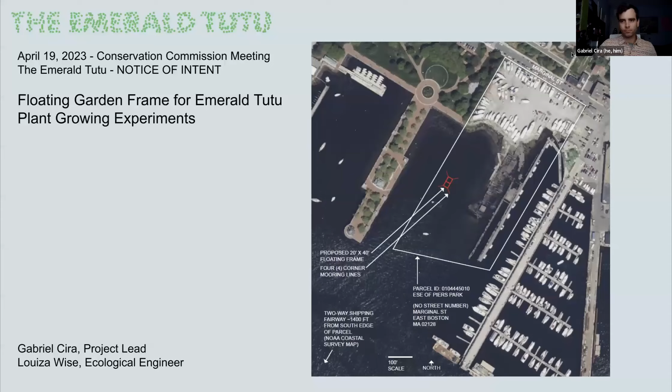Next item on the agenda is a notice of intent, looks like unassigned DEP file number and unassigned Boston file number from Nitsch Engineering on behalf of the Fallon Company for the proposed residential condominium development and subsequent landscaping and stormwater improvements located at 1 Harbor Shore Drive, South Boston. Resource areas are land subject to coastal storm flowage, waterfront area, and 100-foot buffer to coastal bank.

This has been continued from the May 3rd, 2023 hearing. Who's here on behalf of the applicant? Good evening, John Schmid with Nitsch Engineering, and with me is Richard Martini from the Fallon Company. I believe we have a DEP file number 0061938.

Elena, what does that give us for a Boston file number? Yes, sorry for that. It is going to be... That's all right, presumably we have one now. Okay, we do. Okay, good.

So John, I think where we left it off, we had questions about the sales office and its location. Sure, and I think you've made some changes to that. Is there anything else? No, if you'd like, we can scroll forward to the information we submitted regarding the sales office. Yeah, let's focus on that. Thank you.

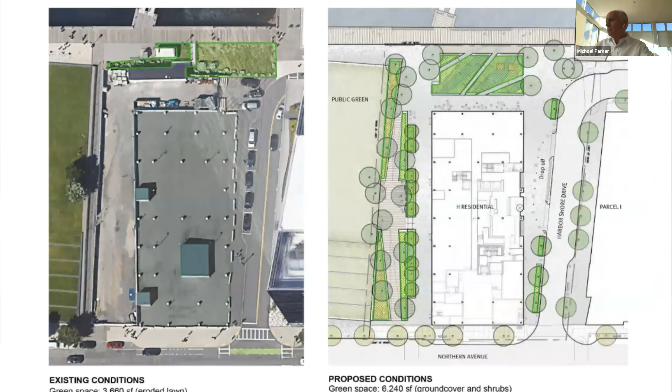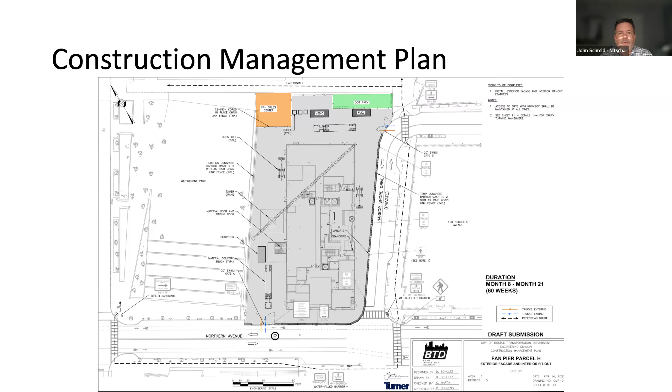One more slide. Okay, so this, as you recall from the hearing we had a couple weeks ago, this is the construction management plan. The orange block in the left corner of the construction area is a temporary sales office. It will be constructed for the duration of the project and removed prior to project completion. Concerns were raised that it was in a VE zone. If you go to the next slide.

So we've advanced the design on the temporary sales trailer within the VE zone. What you can see here is a section where the trailer as proposed would be on piles, and the bottom elevation of that trailer would be at the VE floodplain elevation of 19.48 or 19.5. This would allow for the free flow of water, except for the 3 rows of columns, the free flow of water should there be a storm event that causes flooding in this area.

We believe this is in compliance with the requirements for construction within VE zones. But we also ask that the commission consider and understand that this is a temporary structure. It will only be here for several years during the construction of the building. My client would prefer if we could construct this on temporary prefabricated concrete pads, and then should there be a storm event, it would be enclosed with the aqua fence, the same aqua fence that we're using throughout the development, should there be a flood event. That is sort of the extent of our presentation regarding the sales trailer.

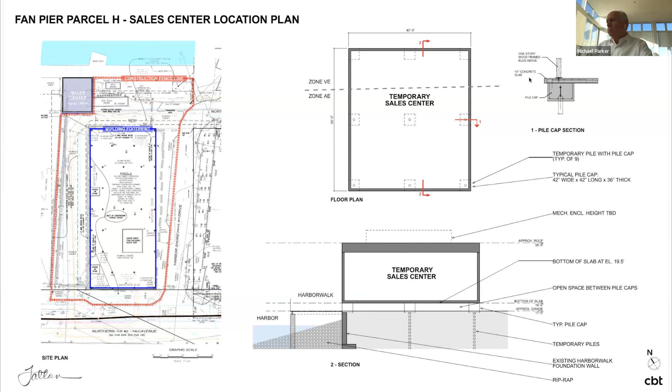I'm going to go to Commissioner Herbst first on this one. This is her area of expertise. What are your thoughts?

Well, my main perspective is it needs to be code compliant, and V-zone does require being on pilings. So if you were to use an aqua fence, the point of the V-zone requirements is that water can flow through freely. So I think you'd actually be increasing the likelihood that it would be knocked off or relocated. Unless there's something that I don't know about temporary buildings, I assume it needs to comply with the V-zone requirements, and I think it should, for a couple of years there's the possibility that there would be a storm like that.

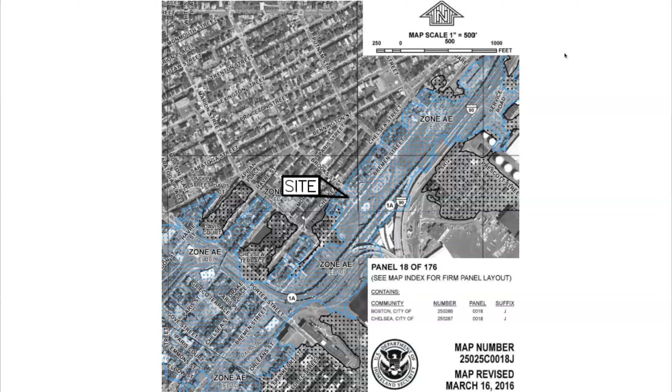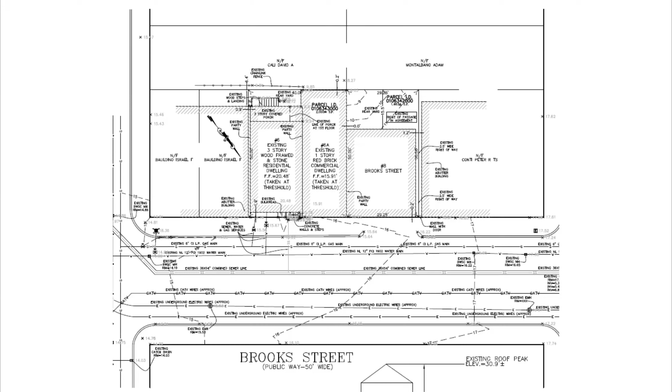But as far as land subject to coastal storm flowage, the project - again, the buildings are going to stay exactly as they are. The structure of the building will stay exactly the same, where the 3-unit building is, you currently step up to get in. So all the living space will be significantly above the floodplain elevation of 16.45. So the grade out in Brooks Street is anywhere from 15.5 to 16.5, but there's 3 or 4 steps to get in. So we'll maintain the first floor living space, and then all the new additions will be significantly above - I think they start somewhere around elevation 20, if not higher, on either one of those buildings. And then if you could just move to the next slide.

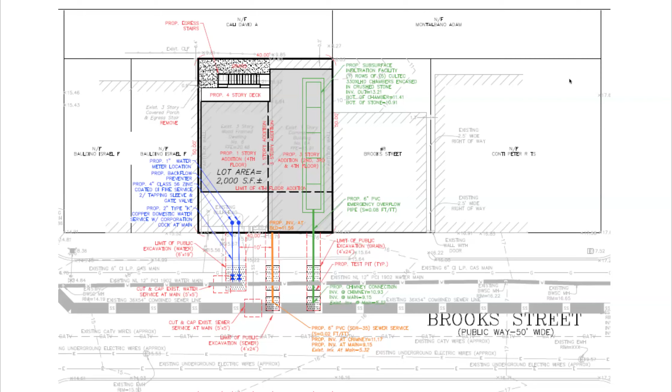I'm happy to answer any questions, Eric. Yep, okay, so you're ready. I was going to say I can answer any questions you guys have. I think it might be the easiest way to do this.

What's going to be in the basement? In other words, where will the mechanicals be? The mechanicals will be above on the first floor or higher, making sure they're above the floodplain elevation. That first floor of the residential is significantly above the floodplain elevation, and they'll all be on that first floor or higher.

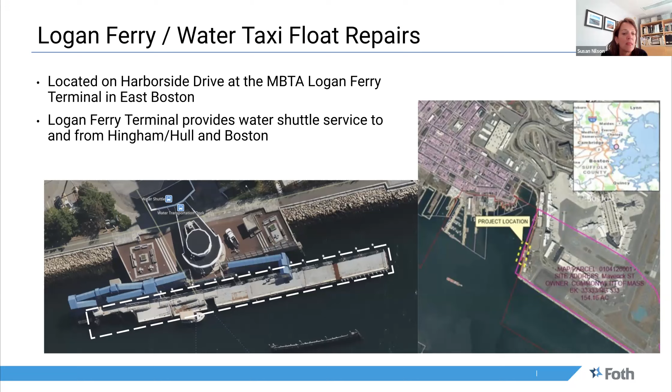So the purpose of the project is for public safety as well as to maintain public infrastructure. These floats are showing signs of wear and tear, primarily in corrosion, but also in some of the steel components.

Looking at, we have a number of photos I can share. Looking at the steel decking, you can see that that's corroded and scaling. And then photo 3 shows the access hatch. Some of these are unable to be opened and require replacement. Also depicting the transition plate here.

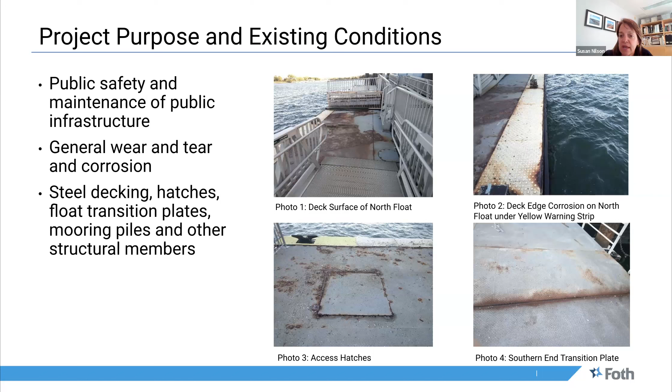If we could go to the next slide, just have a few more photos to show the gangway plate is missing the caution strip. I mean, some of these are minor, but still just wanting to highlight. Also, the gangway pins require replacement. That's causing some of them to be off alignment, which, as you can see in photo 9, creates a potential tripping hazard, just being a little bit off grade there.

So looking to be able to address all of these items through maintenance, again, of existing infrastructure. We could go to the next slide.

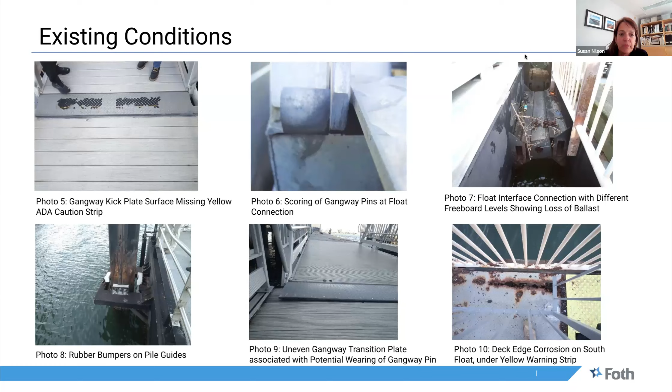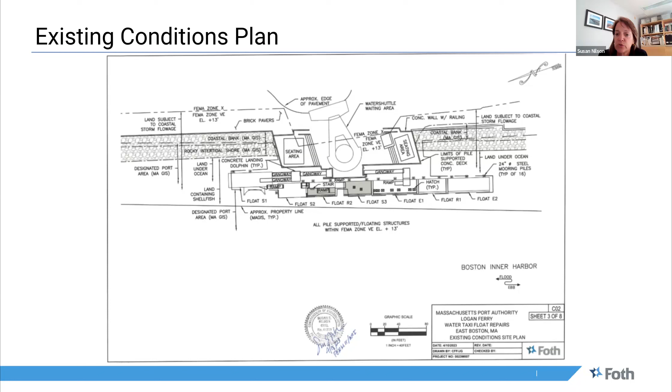I talked a little bit about it as we went through the photos, but the proposed repair plans include restoration of the float edge. So some of that edge stripping, the connections between the floats, there are pin connections there that require replacement, and then replacement of 2 hatches and gangway pins, and then also restoration of the deck. So that's the work that would require removal of the corroded surface down to a surface that would be ready to receive a new coating system, and that would preserve that steel and minimize the future corrosion on it.

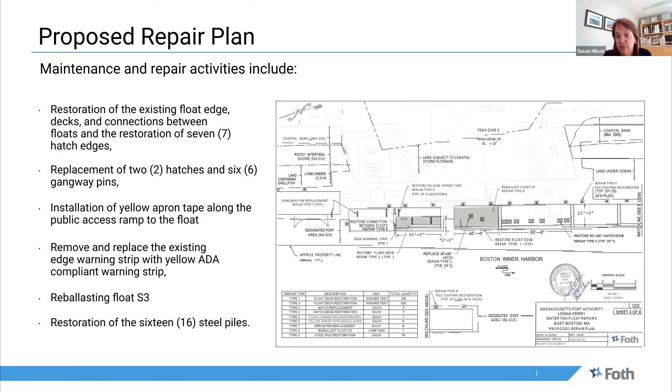And then looking at reballasting the float, which we need to get in with the access hatch and be able to reset that. And then potentially we'd look at also repairing the coating on 16 of the steel pipe piles. The steel pipe piles are what's anchoring the float in place. So the next slide.

So as we stated at the beginning, the coastal resource areas the floats are located within land under ocean, a designated port area, land containing shellfish, and within land subject to coastal storm flowage. And then they're also within the buffer zone to the coastal bank and rocky intertidal shore, all of which you can see on the photos here.

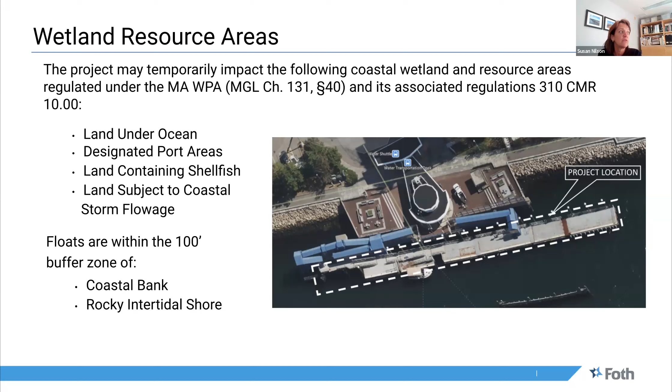That will be a temporary impact. We estimated 19 square feet, assuming, I think it was pretty large size. I looked at 24-inch diameter, which the spuds are probably smaller than that, but just looking for the maximum impact for 4 spuds. That's a very temporary impact. It's just when the spud is placed in the bottom that you would have it drop. It's done by gravity and placed. And then once that's removed and the barge leaves the site, that impact would no longer have... I'm sorry, I couldn't tell if someone was asking a question.

And then on the temporary impacts, we also could have a small staging area on the land side that is an existing developed site.

We may want some space for the contractor if he needs to access from land in addition to the barge. Keeping in mind that their materials for this work are primarily steel replacement or aluminum for the gangway, there really isn't any sort of stockpile or loose material as part of these repairs.

We did include in the notice of intent, and intend to include in the solicitation for bids, a requirement for the contractor to provide a containment system for the surface repairs.

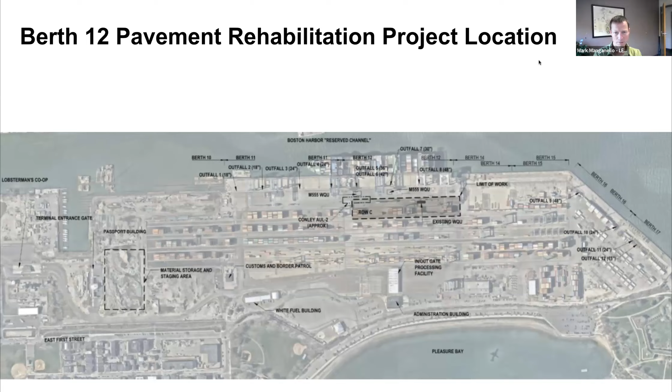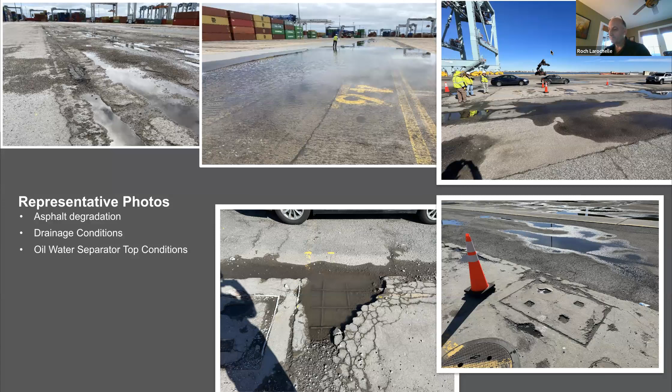These are some representative photos of the area that show the poor conditions of the surfaces there—deteriorating pavement, poor drainage. The project's designed to resolve some of these issues within the project area. And I should say this is part of an ongoing improvements program at Conley Terminal. There are multiple projects, a couple of which have already been completed. So Massport is chipping away at these issues section by section as time and funding allow. And the next slide, please.

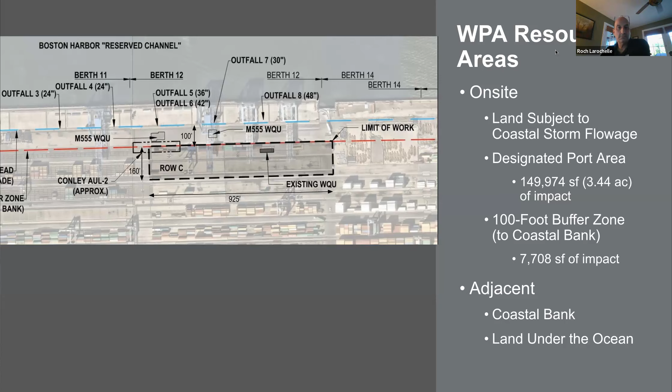And the next slide, please. This slide shows some of the engineering. And with that, I think I'll turn it over to Roch to talk a little bit about the engineering details.

Thanks, Mark. Thanks, Madeline. As Mark indicated, this project is the continuation of the master plan build out of Conley Terminal overall. It's a relatively small part of it, but you can see from the conditions of the pavement and the drainage that it's in need of repair. So this project will just be a pavement rehabilitation of that project area. There are no raised structures. There'll be some drainage improvements, as Mark indicated, with trench drains going to existing outfalls, so no new outfalls.

Part of the project does involve a rehabilitation of a concrete top of an existing oil water separator that we'll be repairing. There was a photo that showed that and some of the exposed rebar associated with that. So we'll be repairing that as part of the project. The overall intent is to improve grading and drainage to eliminate that puddling and to deal with some of the maintenance issues and concerns that they have for year-round operations of the terminal.

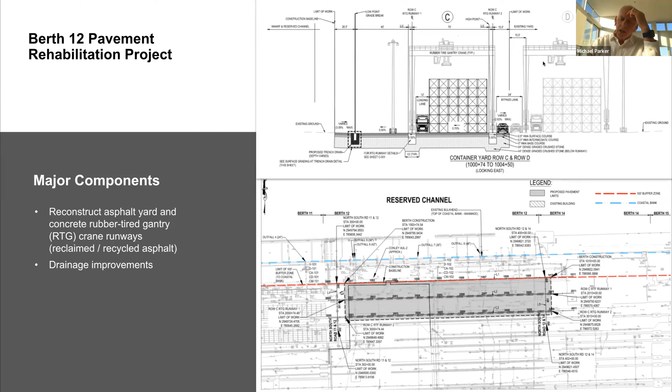Commissioner Long: Yeah, I think I'm interested in these drainage improvements and any consideration you might have had for coastal storm flowage or increased storm frequency with climate change.

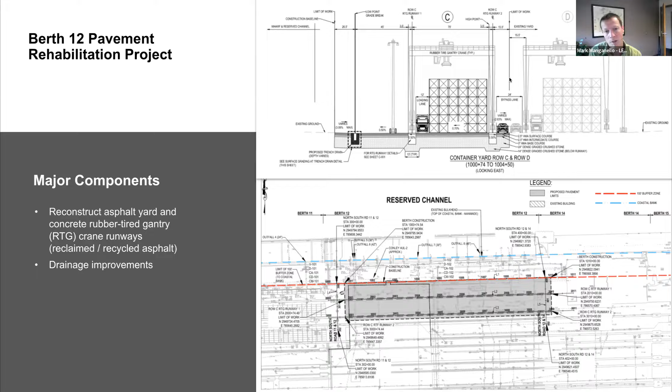It's a great question. Mark, is that something you want to handle? Yes, I'll try. Broadly, the project is going to improve drainage. We're going to get increased frequency and intensity of precipitation events and flooding events, so it will improve the ability of this portion of the larger Conley terminal to accommodate those situations. But we're also somewhat limited here in terms of bigger picture, larger engineering options for dealing with those problems, because this is limited to just rehabilitating a segment of a larger facility.

Thank you, Mark. And could you speak to, or maybe Mark or Roch, to the water quality units that the stormwater flows to?

It's an existing oil water separator that's been in operation for some number of years. I don't recall exactly what year it was put into place. It's going to remain operational, and it gets cleaned out periodically by Massport. In one of the prior projects, there was also a duckbill put on the existing outfall, what we call outfall 17, to deal with backwater conditions from the rising tides, and also to help clean that facility out. It has some hand-operated gates that are operational inside, used for containment as they're cleaning that facility periodically.

And Audrey, did you have something to add on the drainage systems? I'm sorry, my associate Audrey is on as well. Yeah, hi, Audrey Bullock, HDR.

There are 2 existing, recently installed water quality units from the last project that they did right next to this one, where some flow from this project flows to them as well, so there'll be treatment through those as well, and then also the existing oil water separator. So all the water is going through one of those 3 units before it goes through the existing outfalls. Those 2 prior installed water quality units were brought to this commission before the last project, what we call the M555 project, that has been built and is in place now. So a small portion, I think, on the western side of this particular site flows to those. We did not change any of the drainage characteristics of what's out there, so what it was designed for continues to flow in that way.

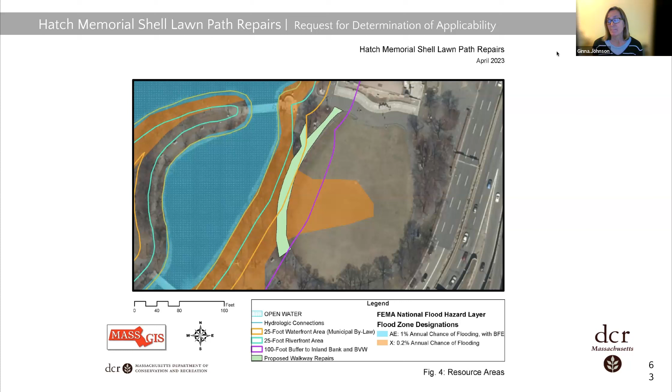As shown on the plan, again in green, work shall consist of installing erosion and sedimentation control devices, installing soil and tree protection fencing, and grinding and resurfacing the bituminous concrete pathway. Drainage patterns will not be altered and path grades will meet and match existing grade. Work schedule is projected to be 2 to 3 days duration, or perhaps shorter. So Liz will now describe the resource areas present.

Thank you, Ginna. As seen on the previous slide, the project is within the 100-foot buffer to the bank of the Charles and the municipal 25-foot waterfront area. But there will be no impact to resource areas as a result of this project since it's all in-kind maintenance, so any impacts will be temporary and minor. I'm happy to answer any questions about the resource areas and the location of the work.

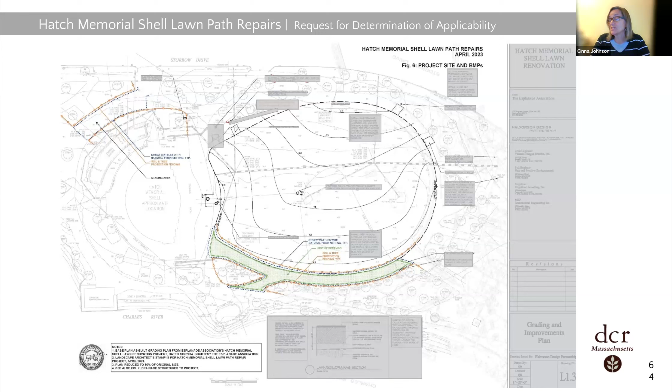Okay, two quick questions. First, what sort of erosion controls are you proposing? We propose straw wattles lining both a potential staging area and the work area, and we'll also have sacks for drainage structures, which we don't expect to be impacted, but just a belt and suspenders approach.

I think I saw that you might be pruning some roots. Does that involve taking down any trees, or how does that work where you prune a root but the tree remains viable? We don't anticipate cutting any roots. However, if a root pops up or something unexpected happens, we do have a protocol: we'll consult with our DCR arborist, use new sharp blades to get a clean cut without ripping or tearing roots, and cover those cuts with wet burlap until the area is backfilled.

Okay, thank you. Elena, do you have anything on this?

I don't have any questions, but I just want to note that if the commission would prefer to not see an NOI for this, we should probably talk about conditions tonight before closing the hearing. And we could also use conditions that would be consistent with those used with Christian Herter Park.

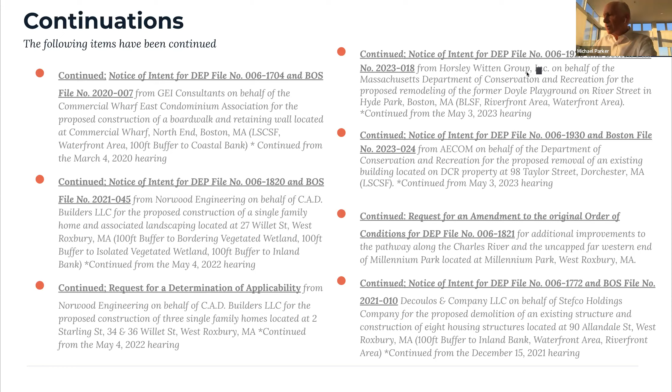First item on the agenda is a request for a certificate of compliance for DEP file number 0061558, for the Olmsted Green Mixed Income Rental Phase Project, part of a multi-phase mixed-use development at Harvard and Morton Streets located in Mattapan. This has been continued from the February 15th, 2023 hearing.

Eleanor, what do you have on this? So staff performed a site visit and requested additional information following that, which has been provided. But we also recommend continuing this item until we're able to review the materials further with the applicant. Okay, thank you. So with that, I would entertain a motion to continue this request for a certificate of compliance for DEP file number 0061558.

So moved. Thank you. Do we have a second? Second. Thank you. Commissioner Long, aye. Commissioner Wilson, aye. Commissioner Richmond, aye. Commissioner Herbst, aye. And I vote aye.

That carries 5-0. Next item on the agenda is a request for a certificate of compliance for DEP file number 0061867, Boston file number 2022-026, for the addition of a second story and associated infiltration chamber and landscaping work located at 125 Havre Street in East Boston. This was continued from the February 15th, 2023 hearing.

Eleanor, what do you have on that? Sorry, just for the record, it's 121 Havre Street. I think just, sorry about that.